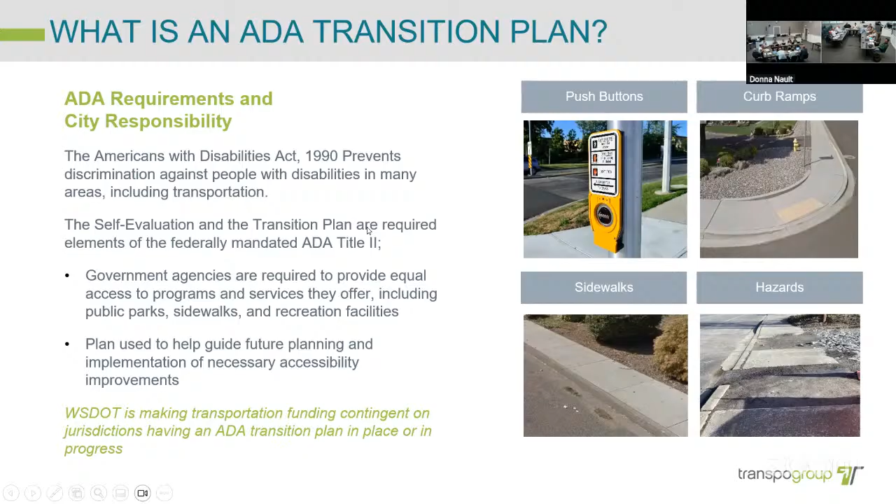So, next slide. What do the ADA plans consist of? They're basically utilized to identify obstacles based on ADA standards. As Jay mentioned, it's sidewalks, it's curb ramps, it's the height of the push buttons as people are trying to cross, it's the slope of the concrete — it's a bunch of things, and that's what we need to evaluate.

You're required to identify barrier removal methods, provide a public engagement opportunity, identify a schedule for barrier removal, and identify an ADA coordinator based on our municipal code ordinance. Our ADA coordinator is the human resources manager, which would be Leandra.

What this is not: it's not a non-motorized plan. There are measures and recommendations for safety and connectivity, but it's not about bicycle infrastructure. That's not included in this plan.

We hired Transpo. I believe I brought that forward to previous council members, and it was approved to move forward with that. Transpo was our engineer that helped us with this, and this is in essence their idea of what an ADA transition plan consists of.

It's a self-evaluation. We had to bring this back to you guys because originally we thought we had about 13 miles of sidewalk, when in reality we have about 38 miles of sidewalk.

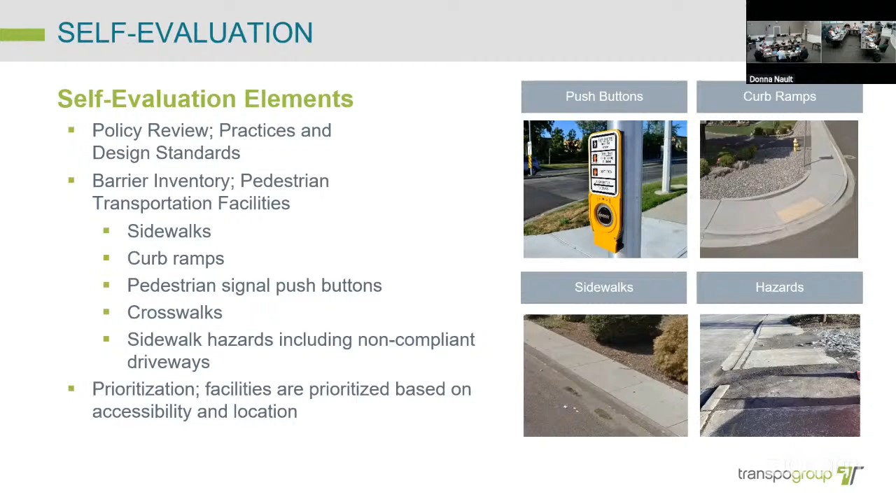As you go through this process, you want to identify revenue sources with regard to how you can deal with these non-compliant issues that don't meet ADA standards. What we typically look at is the capital facilities program - when I come to you guys with projects, the desire is that if we're in an area, we're going to improve it to make it better, and some of these obstacles will be dealt with through our capital facilities project program, like the Safe Routes to School sidewalk project.

We did a lot of sidewalk replacement and addition, that sort of thing. Typically when we're in a capital project - Olympic Highway North will be another one - we go in and remove barriers and take care of obstructions, ramps, that sort of thing. Traditionally in the budget you guys will see a couple hundred thousand dollars dedicated towards sidewalk maintenance, and that was operations doing what they can to replace those things as time allows.

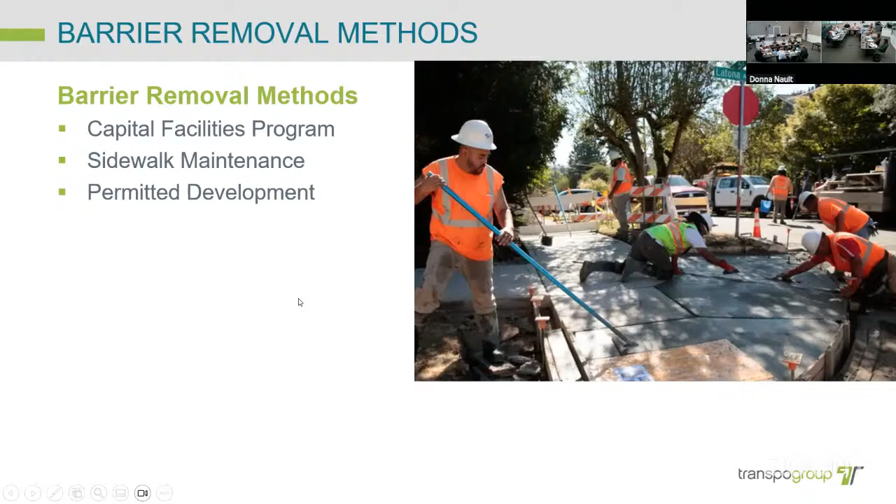And then the other process would be through permitted development. So if a developer comes in and wants to develop in an area, as they rebuild those areas, we ask and require them to rebuild those obstacles and get rid of them in essence. An example of that was the courthouse remodel downtown, which has off-site parking areas and some other things. That parking area needed ADA connectivity to their building, so they were doing off-site ADA ramps at various corners to get people into the building from off-site parking.

I want to give you guys a feeling for how many obstacles we actually have in the city. This is more of a generic presentation, based on what ifs. What I'm going to do is go through here and let you know the actual physical numbers of what we have.

Specific to curb ramps, we have approximately 733 curb ramps in the city. That equates to about 56% of the total amount of curb ramps having significant compliance issues - more than just a slope problem, more like something's heaved up and it's a significant obstacle that needs to be fixed. Minor compliance issues, where the slope is off just a little bit, account for 345 ramps, about 26% of the total. Then we have 217 compliant ramps, about 17%. So in total we have about 1,295 ramps within the city, and more than half of them are not compliant - there are issues associated with that.

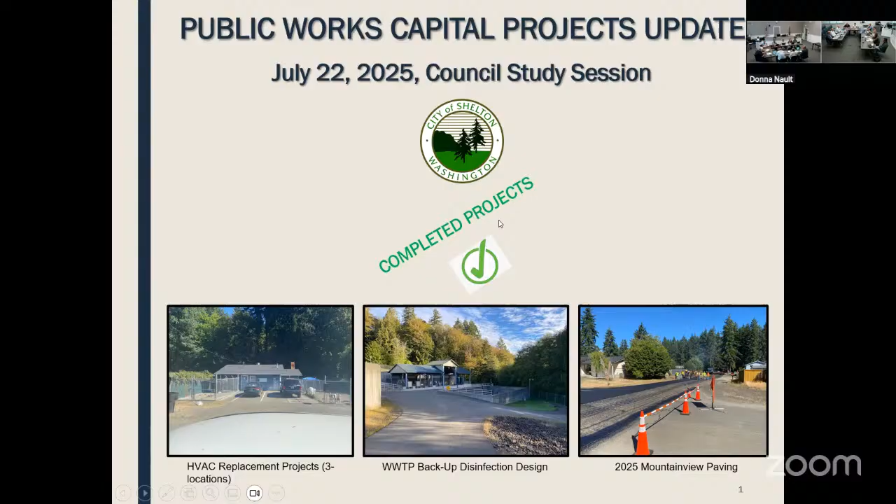So kudos to him—he raked a lot of asphalt on a 90-something degree day. Those two days they paved up there were hotter than all get out. If you would have had a body cam on Todd like the police officers have, we'd all be sweating just watching.

What is Todd doing right now? Can I ask one quick question? Please, go back to the sewer plant. Have we done a smoke test yet? We've been talking for a couple of years about something that will reduce that 8 million gallons a day.

Oh, you're talking about I&I. Yes, we are actively working on I&I. Basin 6 is next, it's on my CIP funding. I don't know if it's 2026 or 2027. I've got it slated for either next year or the year after for design.

Because we know that 8 million gallons is only 4 million in the summer, so it's all groundwater getting into our downspouts or discharged sewers into our sewer system. We know there's I&I throughout our community.

That's been a lot of our problems over the years I've been here - on extremely heavy rain days the slack tank gets full or something quits working and then boom. That's why, for power outages, we put the UV lights with redundancy on those, and we brought in a generator over the years.

We also added the slack tank, we didn't have that storage capacity a number of years ago. Again, it's called a slack tank - if you want to discharge it with water moving, it dissipates that.

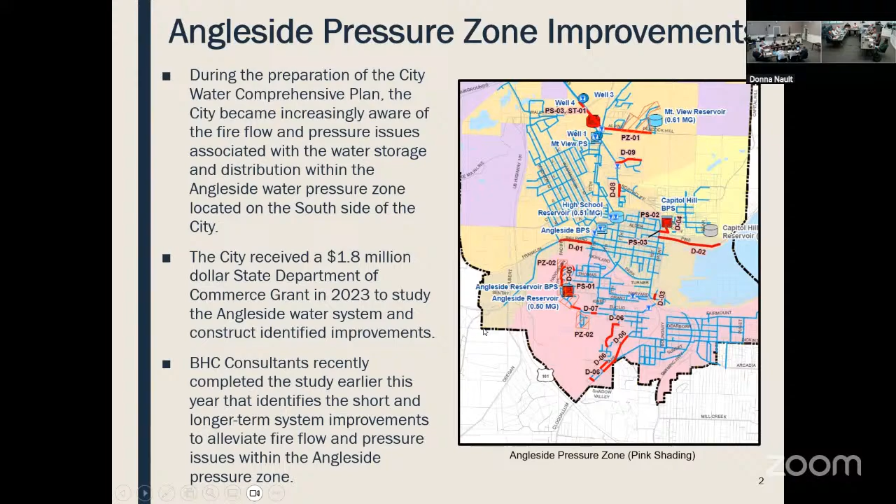It's a really complicated project. There's a lower pump station with 2 pumps, an upper pump station with 2 pumps, and a reservoir - and they all need to talk to each other. The telemetry is a little complicated - they're called set points, what turns on when, what turns off when. It's a really interesting project.

More to come on that - we're near design completion. The consultant has a meeting with us tomorrow to go over the final design. We'll be working on final specifications and the bid package, probably going to bid in 6 to 8 weeks or so.

So this fall it's going to bid. We'll be coming back to you hopefully with a recommendation for bid award, and hopefully we're within budget for this project. It's a pretty technical project with pumps, telemetry, wiring, controls, and some demolition.

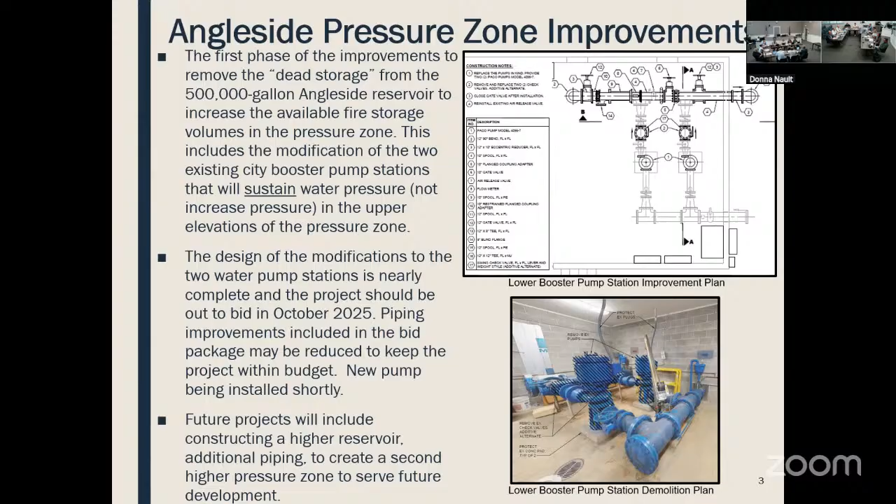That's part of the demolition you can see there - we're replacing some pumps. This will also tie into the next project in the future in Angleside. You can see the existing Angleside Reservoir and Pressure Sustaining Station - there's an arrow right there at the top, that's where the reservoir and station are right now.

The hill keeps going up and up and up. And so we're looking at a potential reservoir site, and it will be called the Upper Angleside Reservoir, to gravity feed that whole area within the city UGA with fire suppression and drinking water.

The good thing about having a reservoir is you pump the water into it, and if the reservoir is sized adequately for growth, you use water. If you have issues with pumping, you have a day or two to get it fixed and pumped back in. We're living on the edge a little bit because we only have half a reservoir we can use, and that water's going up and down like no tomorrow. We're using it very quickly.

So this upper station will provide great benefit to this region in the future. But we have a second reservoir we want to put in first. That's in the Mountain View zone. Do you have a slide in there on that?

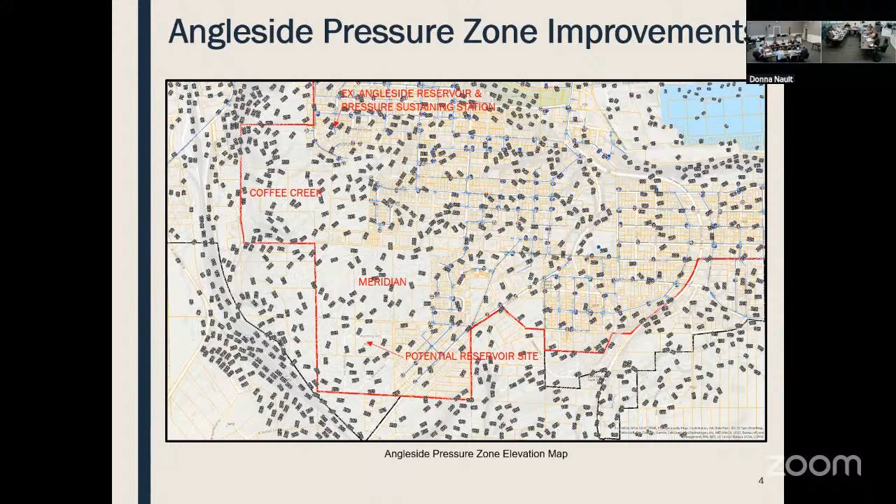The Department of Health wants us to go through these pictures and show that we have the capacity for fire flow. Worst case scenario, they may tell us we can't permit any more structures if we don't have that capacity.

If we're working towards that solution, they'll work with us. We have a state delegation that's been very supportive, and Shelton received $1.8 million to make sure we get this project in, fixing that issue, hopefully getting Coffee Creek off the ground, and providing capacity to the rest of that pressure zone.

The state approved our water comprehensive plan, and by approving it, we have unlimited connections since we manage the system. They keep looking at us, but if that level of trust is broken, where we don't complete a capital project and fall behind or something happens, they can limit our number of connections.

Next project I want to talk about is the Crosstown Trail. This is separated into two components. One was the rail removal project. As we got into design and moved forward, the cost estimate to do the work was about $450,000. Originally it had been brought forward that we'd try to pay for all of it using the rails we were trying to recycle.

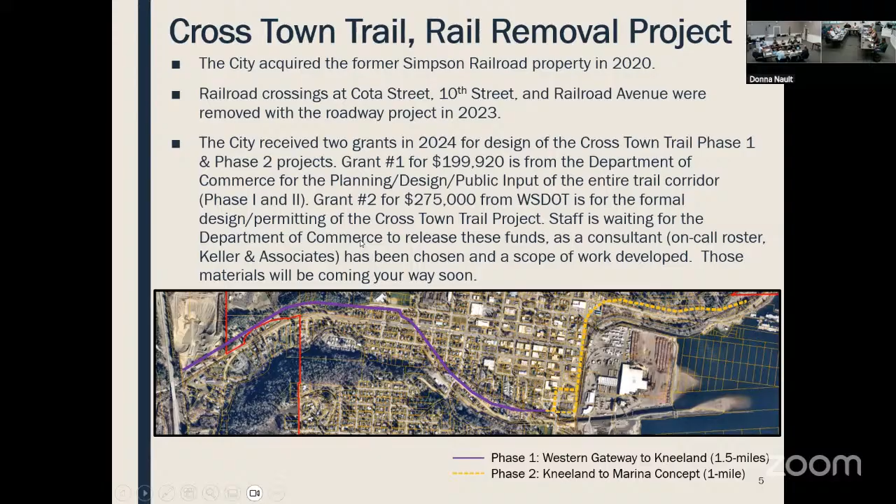As we move forward, you'll also see that work order come in front of you too. The good news about getting final design on projects like this is we'll have cost estimates that are pretty reliable, and we'll hopefully be able to secure grant funding for one or both of them, maybe a piece of one, in the future.

This could be a couple of years from now. Both projects have merits, whichever way you go. I think the Simpson corridor, starting at Kneeland Park and going all the way up to 101, in my estimation is a project more people would use right away, and it's probably a little cheaper because of crossing Goldsborough Creek with the Highway 3 project and going down through the urban corridor.

Then you get over to the Pear Orchard, which is wetlands where you have to elevate something, and then you get out to the marina eventually. That project's probably a little more complicated and maybe a little harder to permit too.

Potentially, sure. So what we've heard is the desired amenities: a 12-foot wide paved path, separated from traffic, lights, benches, garbage cans, public art, and interpretive signage.

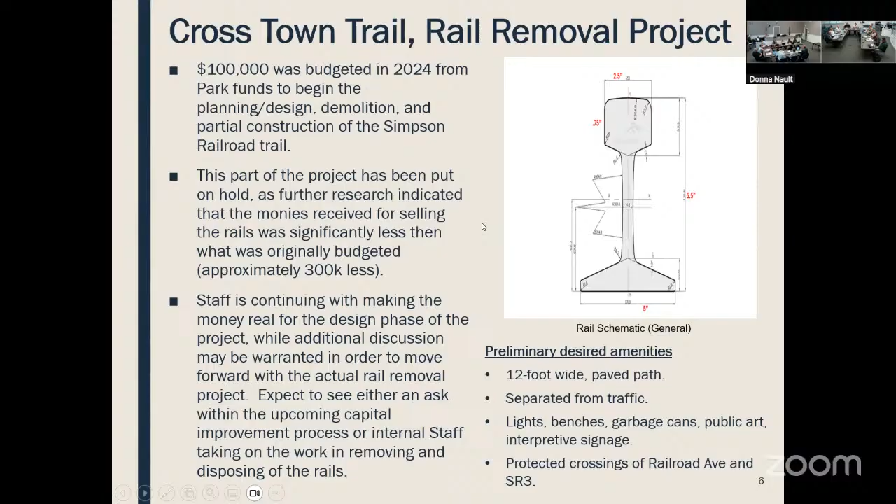Part of the rail removal project is we're going to keep a lot of the old historic railroad crossing signs as well as the flashing pieces, with the idea that we could do some wayfinding signage with them in the actual trail corridor itself. That's part of the exciting planning period stuff coming up, as well as some protected crossings on our heavy traffic areas like the railroad.

I love this picture. That's actually the Cushman Trail, where I raised my kids. I use that trail often. I can't tell you how much of an economic development tool that thing is, because it takes you right through the middle of Gig Harbor and gets you to Gig Harbor North. People utilize this all the time as a safe way to walk. It's just a lovely, lovely trail, and I think it would be a really nice amenity for us here within the city.

Obviously, the benefits: it connects the city's most heavily used areas, parks, park and ride facilities. It's part of the safe routes to schools program. There's tourism potential too, like I said, it's been amazing what it's done.

Gig Harbor doesn't have a parks department, they're part of Metro Parks. So they've been involved in making that happen. They've aligned some of their ball fields and other things with this so that you can walk or bike to where you need to go as opposed to getting in a vehicle.

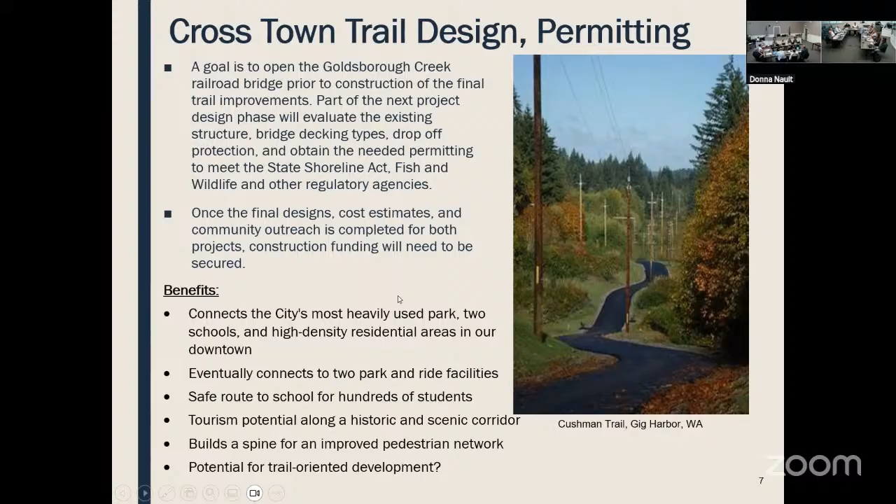This built a spine for an improved pedestrian network, which I've heard is a big deal for us here, and I agree, I think it's an important thing. And then there's potential for trail-oriented development to go along with that. Any questions about those projects thus far?

So it was $100,000 for the material, that wouldn't even cover them removing it? Correct, that's correct, yes sir.

The Parks Advisory Board was impatient in getting this project to move forward, to utilize and leverage this to connect all the parks and make walking and cycling part of life here in Shelton. So from their point of view, we'd like to make this happen.

We'd also like to include the David Shelton Pear Orchard as maybe a destination point, somehow restoring their wetlands or doing a boardwalk there, or taking cuttings from the old pear orchard and grafting these old pears at other sites around the city.

So those are the ideas we were coming up with with the Parks Advisory Board, and this was going to fuel the quality of life in Shelton as far as parks, and for attracting tourism and making Shelton a destination point. That's what the Parks Advisory Board wanted me to relay when we talked about this, so I'm relaying it. I do want to add just quickly.

This is going to be expensive, you guys, there's no way we're going to get around this. I know initially there was a $2.2 million figure. Personally, having built some of these, it's probably going to cost more than that. And the reason I'm saying that is I think it's vital that we try to develop partnerships, anybody out there doing something, try to make a connection with them to get our hooks into other funding resources if we want this to happen.

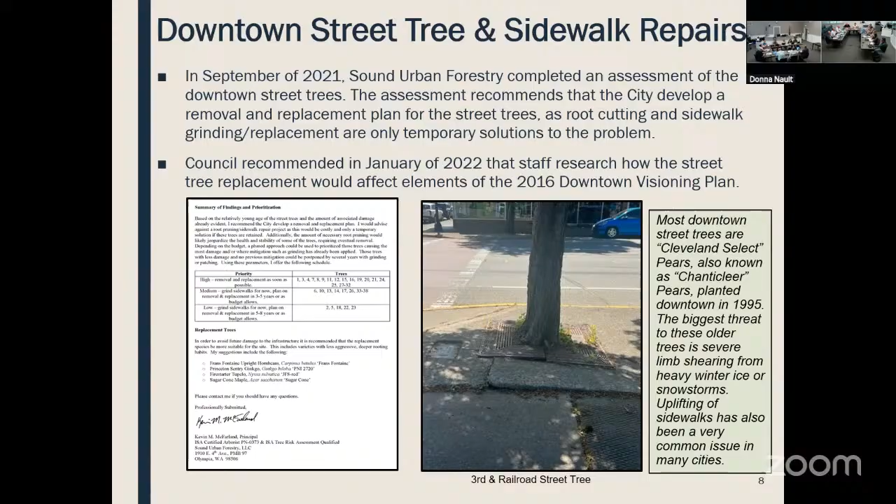We do have a downtown repair fund, $200,000 that was put in the budget this year, that if we have to, we can divert some money to the street tree project, which is really an important safety project. I think the council understands that this was based on an evaluation that was done, I think in 2021.

Jones and Jones actually presented to you guys kind of a streetscape. I know in the public meeting we held on this particular issue, there were a couple folks that were very specific about this and their desire to move towards this, some more green in essence, and widen the sidewalks and that sort of thing.

Right now, this is a safety project, right? And getting the trees out, because I can't keep the trees because they keep pushing up the walk, and put them back where they are. This Jones and Jones report, though, talks about in the future, down the road, that the sidewalks might get widened and the center turn lane might go away and get narrower, and improve the sidewalk cafe ability and that sort of thing.

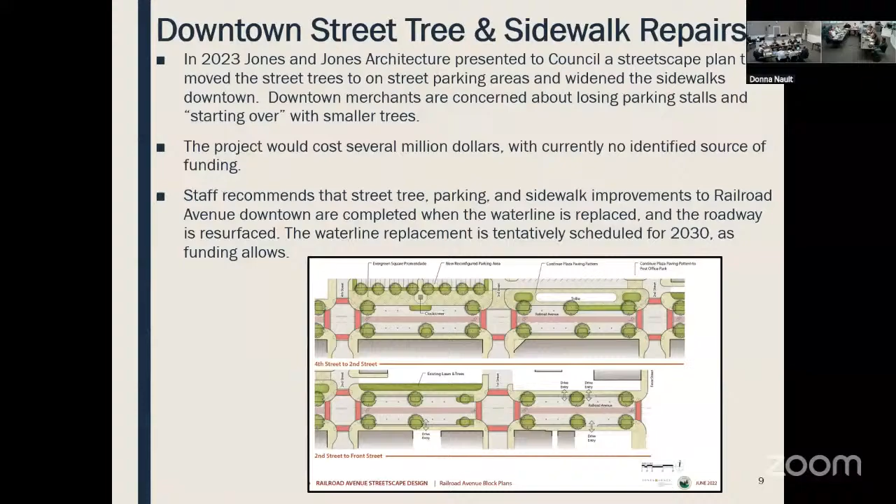Sure, and more green, bulb outs at all the ramps, that sort of thing. These are the project areas, just to let you know. There are basically the schedules of at least, we believe that we will be able to cover all the schedules, so A, B, and C to completely do all of the project. We have the trees already, we just need to get going and get it done.

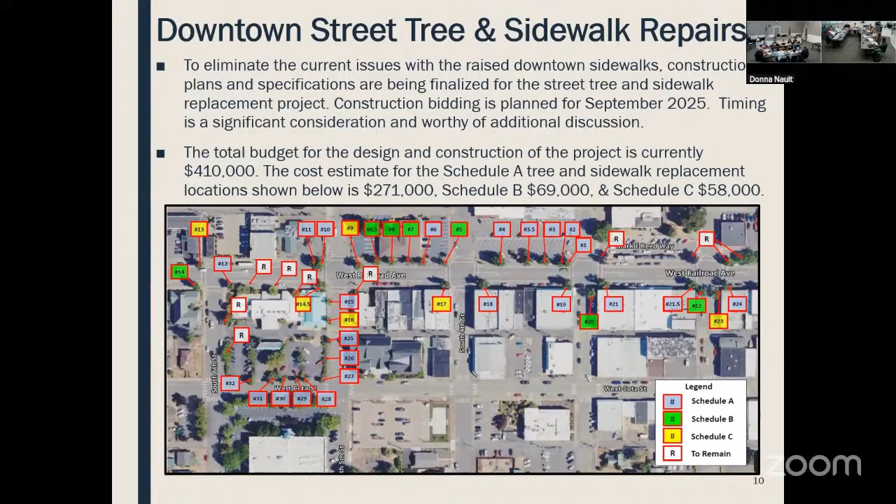The trees are surviving pretty okay. One or two are stressed, but we have basically put them in chips, as well as a watering system, as well as bags, because they are out in the middle of the sun. They're doing okay thus far.

We bought them early though, just because we found the diameters that were available in not very big numbers. We're trying to get larger trees in here and there weren't a dime a dozen for what the arborist said to put in. We had a hard time finding them, so we decided once we found them, rather than waiting, we should procure those. So we might have a loss of a tree or two that we need to replace.

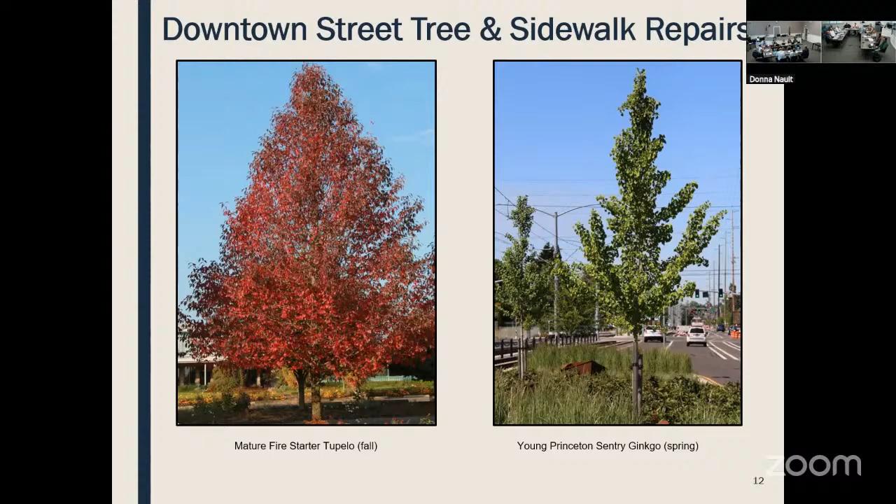But yeah, ultimately, these are the trees that we had talked about. That's the fire starter to the left, and then the young Princeton ginkgo on the right. Very good, columnar types of trees that, unlike the ones we have out there, they are not going to shear off with ice and those kinds of things that make it really impossible. You can't maintain them, it's just the way that it is, the species.

So the pears get brittle with age, but 20 years ago that information wasn't out there, right. This was a very, very common street tree. Olympia, you go all over the place, this pear tree was very, very popular back in the day.

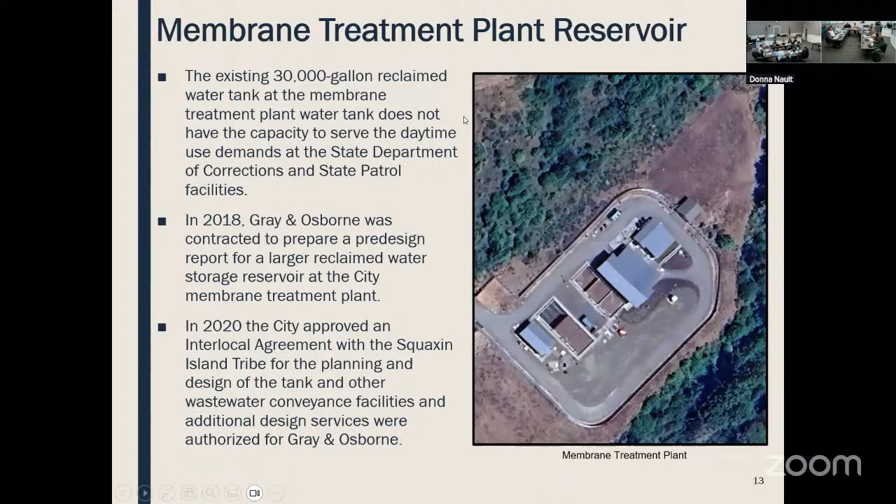This project I've been talking to you guys about, we will be out to bid on this by middle August. In essence, what we're doing is this is the membrane treatment plant. We had a design, going to the next picture, because the next picture actually physically shows you where the new tank is going to go.

Part of the process when I got this project is we had not thought about the permitting process, and we have an interesting issue out here, Jay loves this topic. Believe it or not, there's a pocket gopher that lives out here, and not just one.

He said a pocket gopher. It's more than one pocket gopher, right, Aaron? You're right. The issue with this pocket gopher is you can only find it in here, or Olympia. And it is based on...

Natural processes, it evolved, and now it's a sacred Mazama pocket gopher—part of maintaining diversity. That's why we had to develop this as part of the process. I just want to make you aware of this, because this is the kind of environmental stuff we're going to be dealing with.

Goldsborough Creek, we'll talk about that, is gonna be even harder because we gotta deal with the Corps of Engineers, but the reality of what happened was...

A biologist identified, when they constructed the habitat areas all around here, that there were 2 or 3 or 4 mounds that were actually physically here. There's guidance from Fish and Wildlife that if you impact a certain amount of acreage, you have to replace it with other acreage. That's what we did—we compensated for the impacts here.

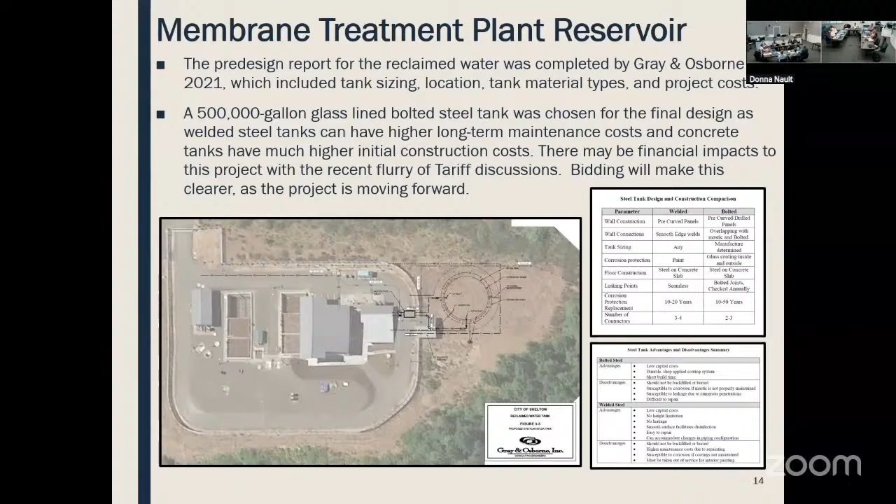Now, I say that, but we still don't know about tariffs—the reality is it's a steel bolted tank that comes from the UK, so there's probably gonna be a tariff on this. We have adequate resources, but we may have to go into the sewer fund to see what we can or can't do. Once we get our bid, we'll evaluate the tariffs, the contractors, lead time, and what tariff hits when, because my understanding is the tariff doesn't hit until it's actually received at a port here, so you can't pre-plan that. We don't quite know what that's gonna be. It's an interesting subject.

I'm more curious about pocket gophers again—so what if a private developer owns 900 acres? Same thing, yep. Wow. It's part of the EIS, the environmental impact statement, for the Hall Equities property—it's about the pocket gopher habitat.

And it's interesting because if you log the property, their habitat isn't in a wooded area. So if you log and clear that property, they could move in—you've just created habitat for them, and then you have to mitigate that later. They're prairie animals.

That's why they love the airport, it's all prairie out there. I remember when I was in Colorado, I saw prairie dogs go in one hole and come out the other—this is a gopher, completely different. If you're ever up at the county shop, the Upper Mountain View Reservoir elevated tank stand, you'll see a pocket gopher habitat they installed there back in 2017-18-ish.

Here's the tank, you guys—that's what it's gonna look like physically, a domed top. You'll probably be able to see it, but that's the actual structure, a 500,000 gallon bolted steel glass-lined water tank. The idea is this will allow us to store clean water, so as we're able to sell more, we'll be able to store more and make more money. Right now it's just the state patrol, the prison, and Tractor Supply using it for watering.

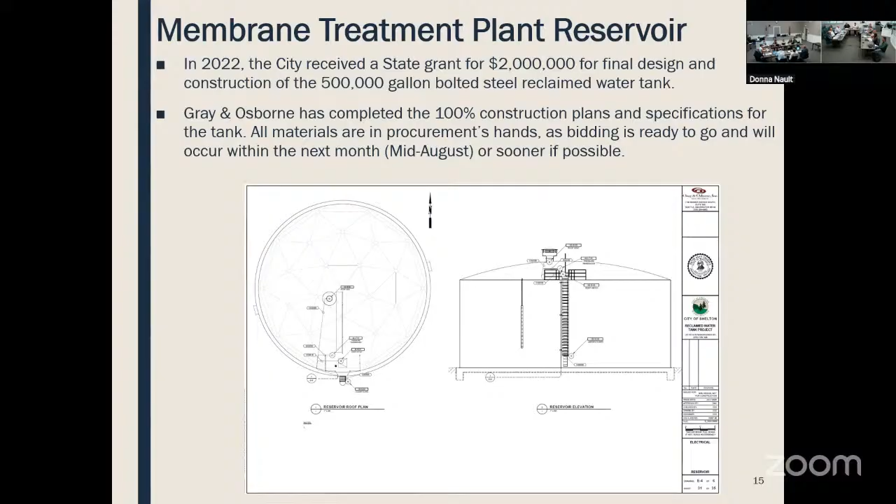Again, mid-August is when we're going out to bid on this one, just to let you know. One that's out to bid right now is our secure center, civic center, secure police parking area.

As you recall, Mark got some resources with regard to provide a gated area over there for our police department. Ingress and egress in and out of this building is somewhat dangerous in that there's cubbies, and people can hide.

The idea is we're now going to have basically a 7-foot fence. It's 6 foot this way, but then it dives in like that. I was told by the manufacturer that no human can physically move themselves to get over the fence, meaning there's segregation far enough, you have to be strong enough to try to.

That's what they claim. But in any event, I also had mentioned that we had researched a bunch of security providers. Genetec was the one that we all decided on with our IT person. In essence, we already have the software.

You've already seen the one contract here at your last meeting with regard to Genetec, and it's about $60,000. In essence, that is all the brains and the hardware, the cameras, the enter and exit panels. It's all the hardware associated with this.

The actual project itself is all the infrastructure to support that. So all the tubing, all of the gates, all of the other stuff. In addition, we're going to add some more lighting out there so that they can see better.

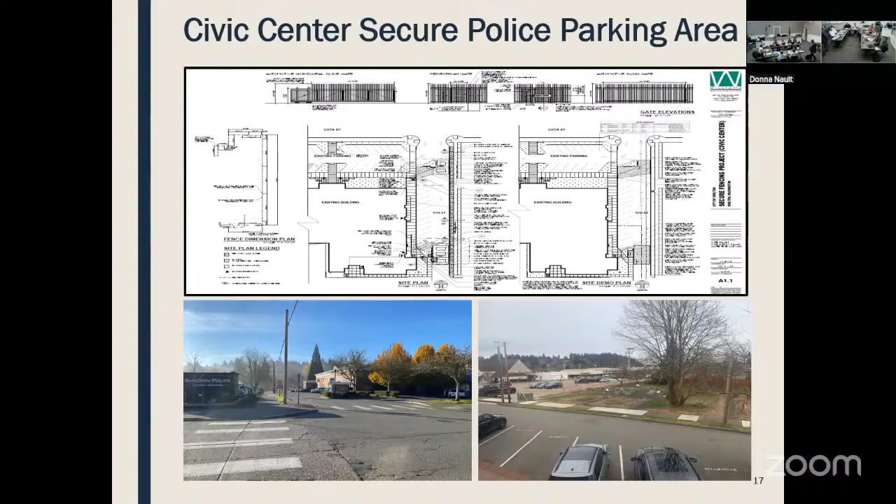Another project we want to talk about is Olympic Highway North. We just learned today that we have systemic pedestrian improvement projects at 3 to 4 intersections around town where we're going to improve how people cross, with lit crossing signs placed. One of those projects is at Olympic Highway North and H Street, which served as our match money. That intersection is going to be improved with flashing beacons. We just got word this project is about ready to be approved by WSDOT, so we're moving forward on design with the desire to be paving by next summer.

This is in addition to the 3.5 million we got to reconstruct this road. It is not in good shape.

It's to be fixed. Somebody also asked me if we were going to be upgrading any lights on that road, the actual PUD lights. We're in contact with them, and part of our project kickoff meeting will be a meeting with them to identify how and where. It's a little dark in winter. Understood.

We'll see. I think a lot of that 3.5 million is going to be in physically reconstructing this road. We have to get a geotechnical person in here because we want to correct it so we don't end up with something like this again.

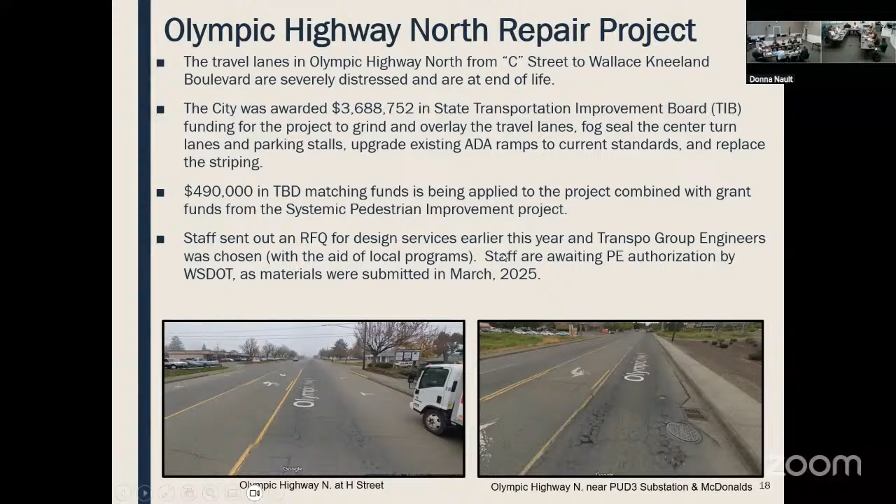Again, we have some pictures. This is the Mountain View area paving we just did on the 15th and 16th. The red is basically the areas identified as where we were paving. It went well, they got it done within a day and a little bit the next day - actually 2 full days, and it was 1,300 tons of asphalt.

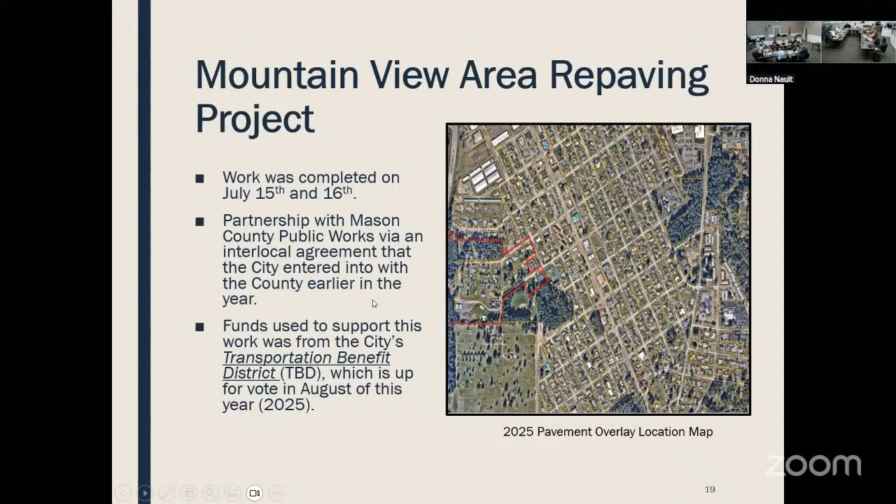The trucks from the county hauled like madmen, the paving machine was going out mad. Todd Rhodes, the project manager, admitted it only should be 500 tons a day because it was way too stressful, a lot of work for one paving machine and that amount of trucks having to drive all the way to Olympia.

South Tacoma, 10 tons is what they carry, I think. Yeah, that's the max. So we did 1,300 tons—a lot of truckloads.

So the paver goes by and then the rollers come through and compact it. In this case they put down 2 inches uncompacted, and when compacted it went down to about 1.6 inches. You have to rake it, smooth it, and do a bunch of edge work.

We had all sorts of people up there—city staff doing traffic control, raking, getting water, helping people, running errands—and then county staff. They had significant resources between their trucking, equipment, and number of people on site. And it was a hot day too, so kudos to everybody on that project.

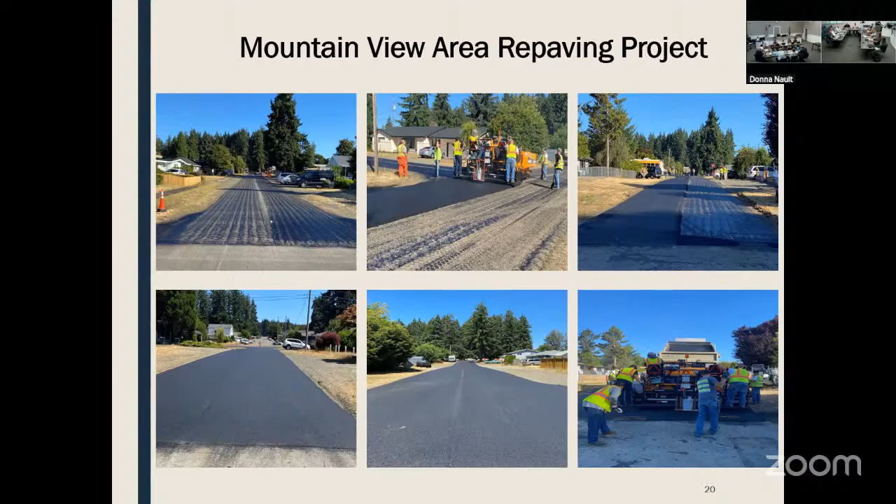I talked to a lady who came by the booth at the exhibit on Friday, and she said thank you. I said, make sure you vote. She's like, oh, okay—so right on. But I told her, your decision ultimately matters. Anyway, they understand the significance of that.

Just some final slides to update you—these are other projects we have going on. A lot of these we've talked about before, but I just want to make you aware of them.

Some budget, I think $20,000, was set aside to add irrigation to Northcliff Park. Our people are going to do that work—I know they were looking to purchase what's needed to make it happen, and we'll probably get going on that this fall, from what I understand talking with Luke.

Something else recent—we were able to find a contractor on the state procurement contract, and we now have a bid for replacing the UPS, the uninterrupted power supply that feeds this building. What that does is supply 15 minutes of power until the generator can kick in.

The idea is we want to try to save the servers. What we recently experienced with a power outage is the UPS doesn't work—the batteries are so worn and done that it just kicked off to the generator. We're going to replace the whole system, new batteries, new system, and we're working on the work order right now. We already have the bid, and it's already budgeted, so I'm just letting folks know about that.

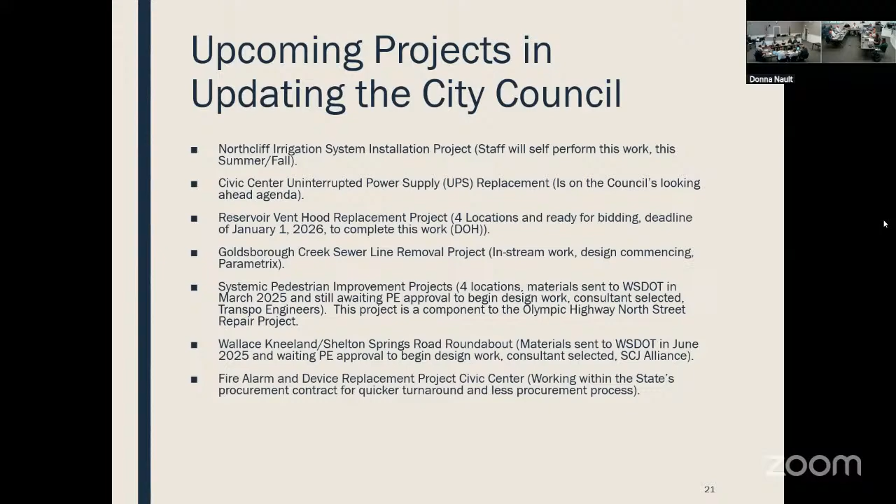Anything else, Jim? No, it's a good dose of projects.

Very cool picture - that was our Springs house back in 1958. I don't know where he found that, I've been looking in the archives for something like that for a while. You can see the pipe getting ready for a project. I suspect the fence was to keep the cows out. Is that the collection pipes - wood stave pipe with banding on it? It kind of looks like something else... yeah, it could be, it's black though, interesting. Not in the 50s though. Look at everything north - it's all pasture. Yeah, you see the fence that kept the cows out of there, the whole bit.

That's our update, council. If you have more questions, please ask.

I have a question - going back to the disinfection design, we were looking for more money for that. That directly affects the water, the water quality, and the shellfish. Have we talked to the tribe about that? They actually were on board with us getting the design money, so yes, we have talked to them about that. I think anytime we would want a support letter from them, even though they're an independent sovereign nation with their own pool too, they've been very receptive. They're very much in favor of any habitat project, like the Goldsborough Creek piece.

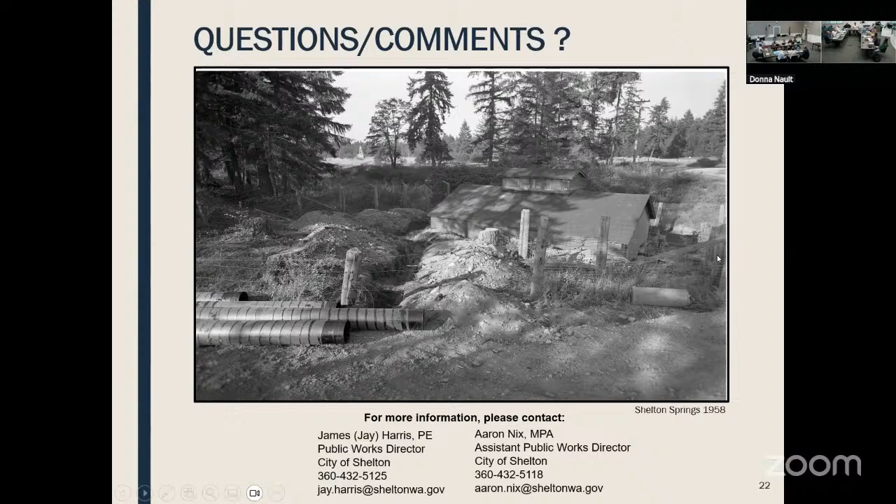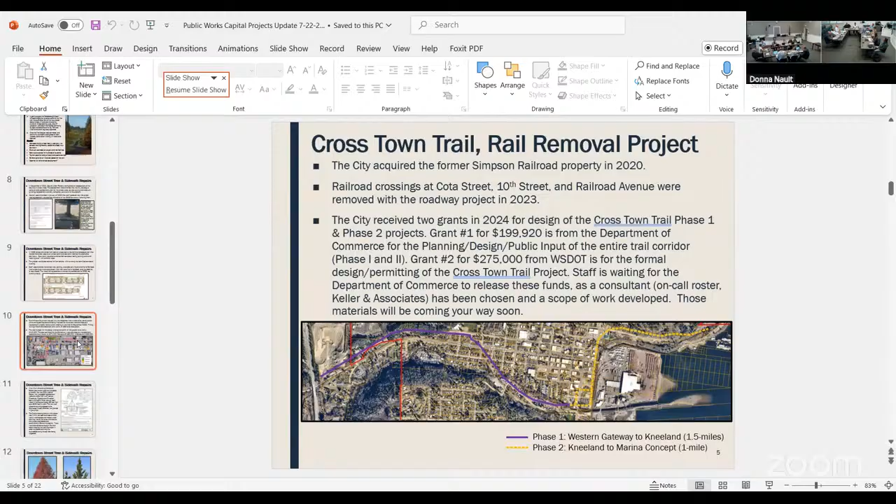Not for this project — this is a maintenance project only, but Jones and Jones presented a concept that was actually in the downtown plan. No, it was done afterwards — the downtown visioning plan, and Jones and Jones came in afterwards, in 2014 or whatever. Part of the visioning plan was to do some of those things, but Jones and Jones took that idea and amplified it. So that's all that was.

The city manager at that time asked me, if you're doing the street trees, can you make part of this downtown revitalization plan happen? Jones and Jones came back and said the curbs are moving, the sidewalk's getting wider, and likely the turn lane will get affected, or the parking, something will get affected there. That's as far as it went.

The cost to do that was millions and millions of dollars. So we need a project that makes sidewalks safe right now. We're just doing a replacement-only project, but that's up for future discussion in terms of downtown revitalization and exactly what happens with the street in the future.

In regards to that, I would just like to ask, have we considered what the impact to emergency vehicles would be, especially since we're expecting population growth and perhaps increased traffic?

If the street configurations change, yeah, that all gets looked at, and they comment on it. The fire department has a lot of different standards for that type of thing, like turning radiuses. So yeah, that's definitely on their radar, and whenever they're looking at our subdivision plans, they're commenting on all new roadway designs.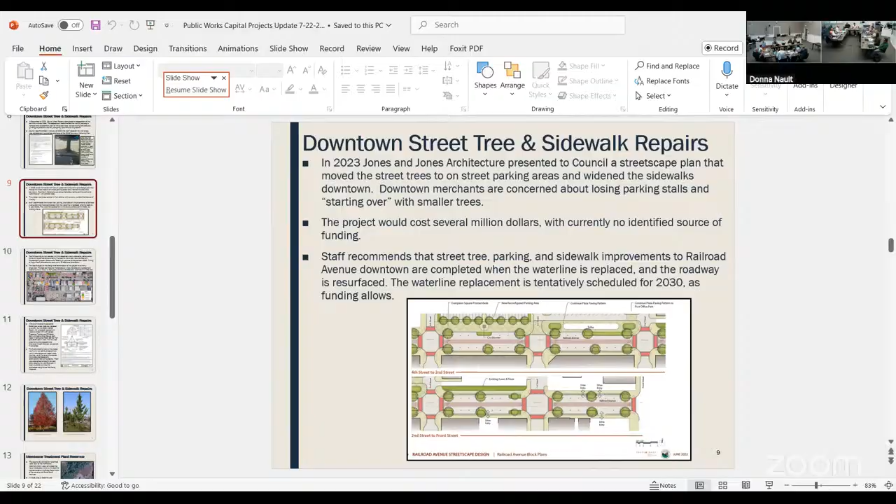You're welcome, of course. There's no other questions? Thank you, gentlemen. We'll move on.

Come on, let me share my screen. To talk about ordinance modifying signing authorities. Mark, just in case you want to move that mic over so it doesn't blink red, because sometimes I can't hear you. Oh, well, it's on purpose.